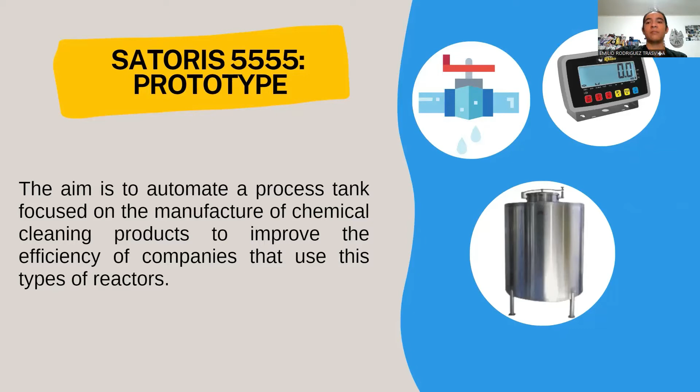So the main idea, the problem I'm addressing in my project, comes from my job. I work at Macroclean Química, Durango, an enterprise dedicated to the fabrication, distribution, and production of chemical cleaning products. While working there, we use reactors to produce all the chemical products, but the process is kind of slow.

It's kind of hard because you have to carry all these bottles. The containers are super heavy, and sometimes it's dangerous even for the people who work there, being exposed to all these chemicals. Despite having the right protection, there's always a risk.

So we want to try to reduce that risk by automating the raw material that comes from containers, directly pouring them into the reactor, and that reactor is going to have a motor which will help make a homogeneous product without any contamination.

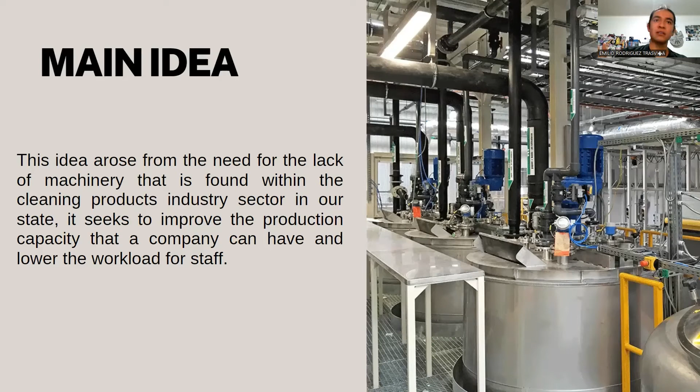We are only focusing on the cleaning products area, because you might say you could use it for producing, for example, drinks. And yes, technically you can do it, but in my case, I don't want to deal with those rules because they're super strict. If you're going to produce food, you have to be super clean, with super high quality standards, and I just don't want to deal with that.

On the other side, a quick description of the project: you have the reactor, and that reactor will contain the final product and is going to mix all the raw material.

That material is going to be dosed by containers connected to electrovalves. With a matrix keyboard, you're going to press it and select how many kilos you want of each container. For example, imagine you have 3 containers, A, B, and C.

If I press on the keyboard 3 kilos of letter A, 5 kilos of letter B, and 7 kilos, for example, of letter C, it's going to be dispensed through the electrovalves and fall into the reactor through a hose. Everything is going to be connected by hoses, distributed from the connected containers, and the liquid will be dispensed.

Well, most of the raw materials are liquid, and will be controlled by solenoid valves. Everything is going to fall again into the reactor, and it's finally going to mix and obtain our final product. And in my case...

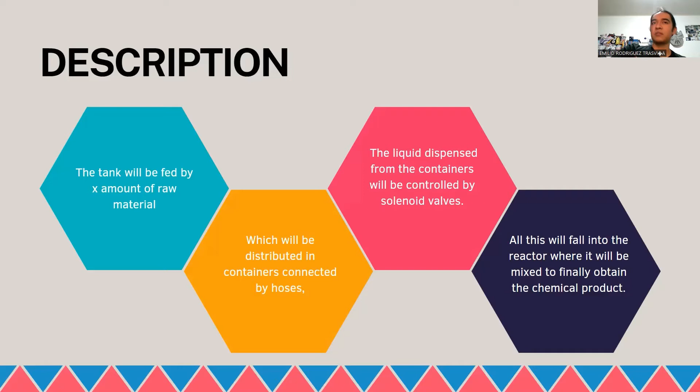In my team's case, we selected disinfectant multipurpose cleaner because it's easy to contain, easy to use, and it's super cheap. So we're not going to get any trouble with getting the raw material product.

Then the objectives we have in this project are to automate the manufacturing process of cleaning chemical products. We want to help enterprises get a lot bigger production, and also reduce the time that it takes them to only produce a few chemical products.

We also want to optimize the capacity and production times, because for example, if you take 1 hour to elaborate 1,000 kilos of one type of product, and it takes you 2 hours in the reactor, you can take the same amount of time but produce double, and only one person will be needed.

Then we want to allow a homogeneous mixture in the final product, because every raw material must be mixed in perfect conditions so the final product will work, because otherwise it wouldn't.

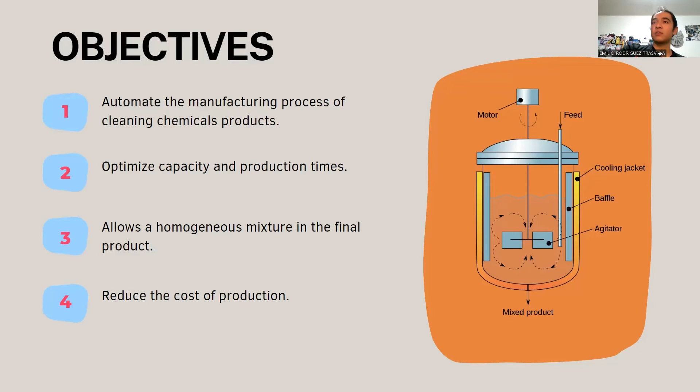And we also want to reduce the cost for enterprises by using this type of reactor, because it's not super cheap, but it's going to be accessible, at least if you are in this industry.

Here's just an approximate cost of what we wanted to use. We'll explain it further in the automation part, but here's just a quick review.

We destined most of the budget to the load cells, which are expensive because they have to be a good trademark, otherwise it won't give us the exact kilos we need.

We are going to get an Arduino One, Uno, or Mega. We don't know yet, but we will try to search for Arduino Mega because, in my personal opinion, it has more inputs and outputs. But it's something we will discuss in the automatization part. I will need to talk with my team.

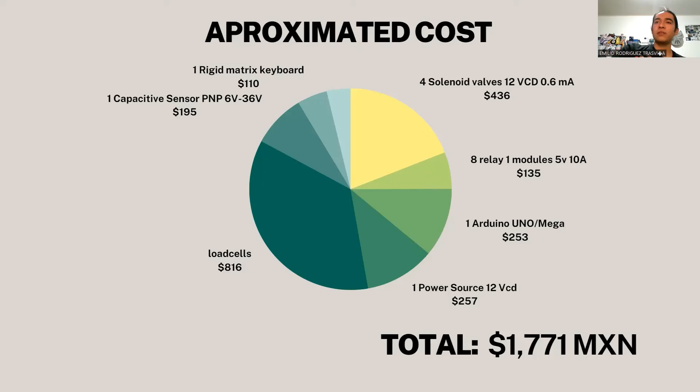Then we have the matrix keyboard, the solenoid valves, and a capacitive sensor to detect the amount of fluid in the tank. All of these will give us a total of 1,771 Mexican pesos. Then, here's the last part of the project, the Gantt diagram.

We are only 3 people, which means that one of us will have a little bit more work. In my case, that's me. I am the leader, and I am on the document part and the design part.

But we're going to help each other. We will start on September 26th, and we will only work on weekends. That's because, in my case, I have to work, and my other teammates are pretty busy with their work and personal life, so we decided to only put effort on the weekends. We will start with the sketch, which is basically the easier part.

As you can see, every weekend we will advance on writing the document, because it's something that everybody can do at their own pace. But there are other tasks that might need a little bit more time.

For example, getting the materials, building things. If we don't do it in time, well, that's a headache. We want to take our time to present a good project, and not only do it because we have to get good grades.

It's starting September 26th, 30th, and every weekend we are going to present advances to our teacher. In this case, the automation part is next, then programming, and at the end the document.